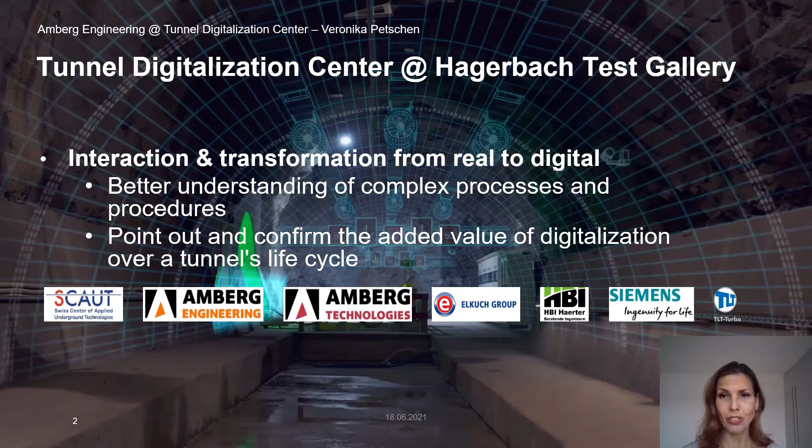Therefore, a partner ecosystem under the lead of the Swiss Center of Applied Underground Technologies was established, including industry partners Amberg Engineering, Amberg Technologies, Elkuch Group, HBI Haerter, Siemens, and TLT-Turbo. The focus is put on cross-phase and cross-divisional system solutions that cover the entire value chain, respectively, the entire life cycle of a tunnel, starting from the design using BIM, the operating and safety equipment, up to the operating phase and digital maintenance.

Metro lines, railway, or other infrastructure networks are part of today's smart cities, of the smart infrastructure. No matter if you are constructing something new, restoring or operating an existing network, we would like to show you how the latest digital solutions can help you to deal with typical challenges and make your teams work more efficiently. I'm going to mention some solutions that we offer in order to plan the new faster and model the existing, in order to integrate them into the same model or database.

Now, let's talk about the solution. We are regularly involved in underground projects by contributing with our know-how in every project phase, from the planning through execution till the operation, inspections, and maintenance. We aim for solutions that are useful for the whole life cycle. We create a digital twin that unifies all the discipline-specific models that can be fed with real-time information and can be connected to databanks, cloud solutions. And let's see how we get there.

In the case of new constructions, we get to a three-dimensional model by the process of digital planning. But we also have tools that can help us create a model from the existing structures. With parametric design, we create our model by smart copying the repetitive elements. It means reusing elements from our already existing library with specific or semi-automatic modifications.

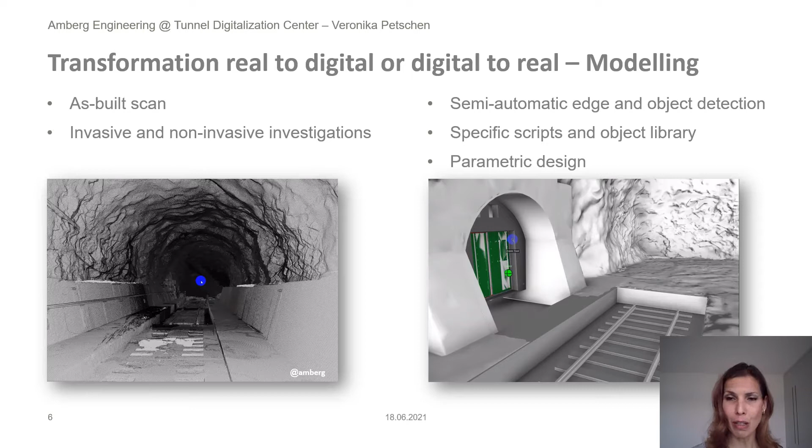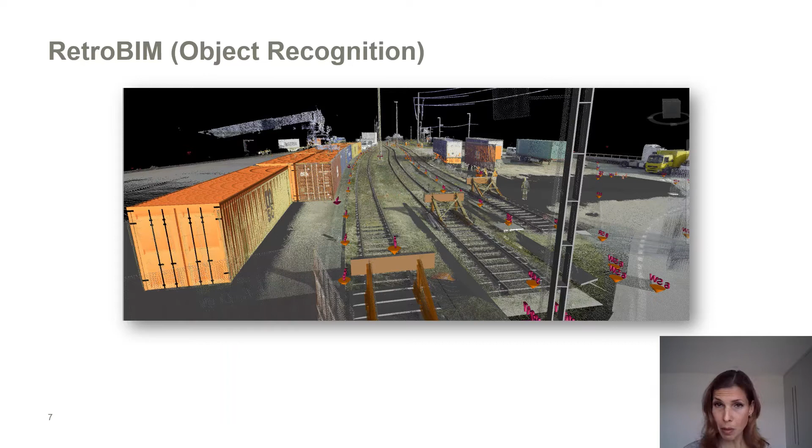For modeling the existing, we use laser scanning as a basis, and we recently developed an object recognition tool in order to drastically reduce manual work in modeling. How does it work? We take the point cloud from the as-built survey, analyze it, identify the elements for which we already have similar ones in the libraries, semi-automatically match and adapt them. And finally, place the right elements in the right place.

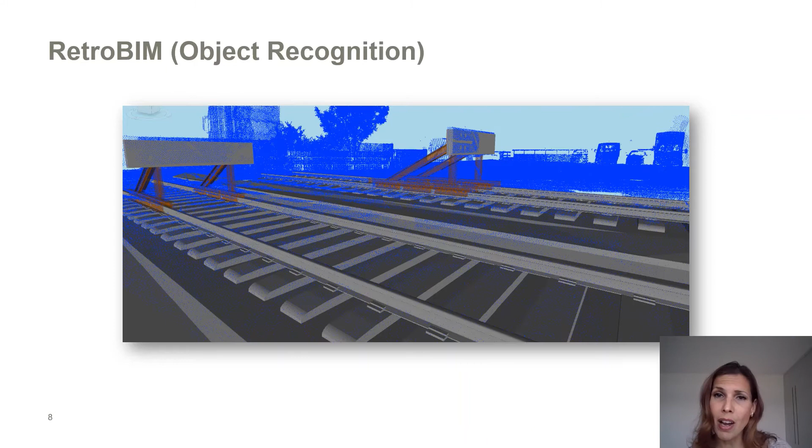Modeling geology and integration of the model in its context, meaning the digital twin model, via georeferenced elements is a must in tunneling. Underground structures are made with and in the ground, so it's essential to have a good model of it.

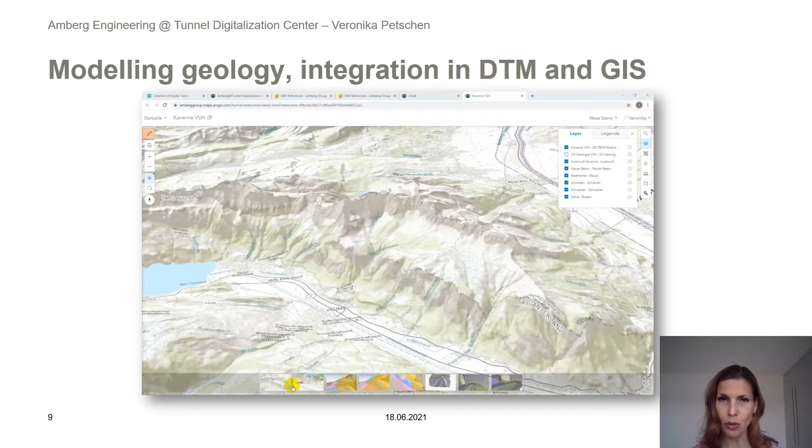If the three-dimensional model is ready, we need to feed the model with useful information. There are very user-friendly ways to visualize information. For example, just by clicking on one of the elements and getting what we want. A well-structured attribute system is a must for this purpose.

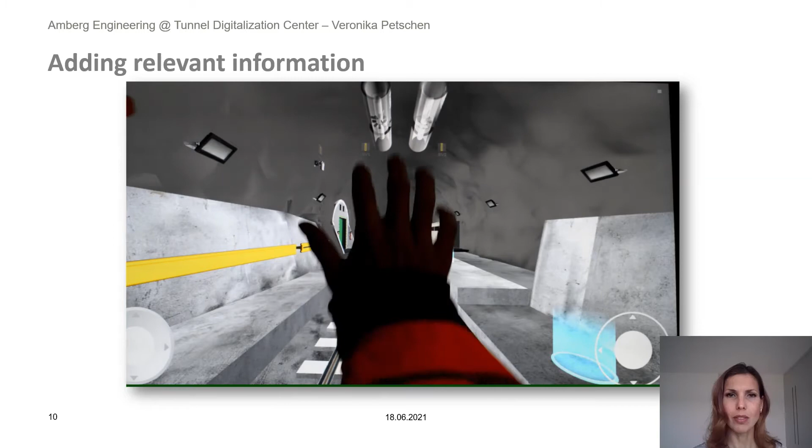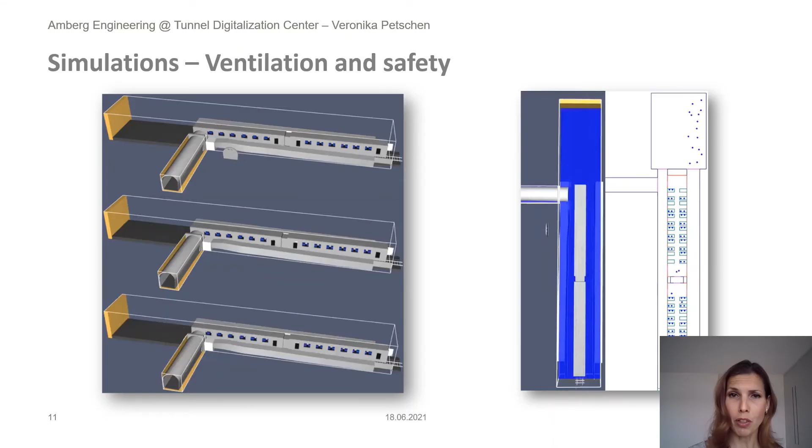For what else do we use all this? Let me just show you some possibilities. Simulations are very efficient to make before the construction or before the commissioning because you can prevent disturbances and accelerate calculations. The digital twin is the perfect frame for this purpose. You can also use the digital twin in order to simulate logistical problems by planning the construction program.

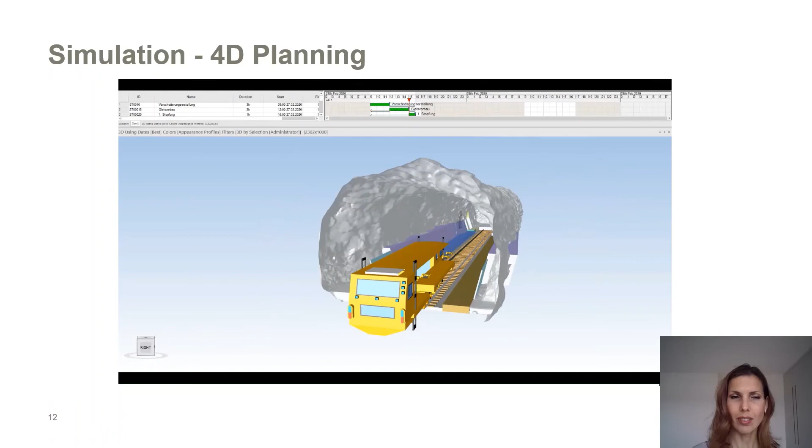For what else is a digital twin useful? Increasing dependency is not an option anymore. We use open data formats, obviously adapted to the client's needs. That's why we would like to use the Digitalization Center as a platform to have conversations about the needs and the possibilities. So in our digital twin, we collect data about geometry, metadata, and reconnect it with geographic data.

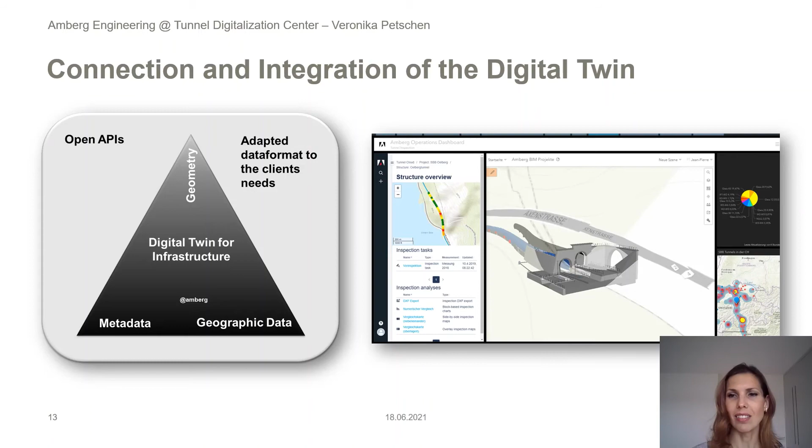A perfect solution is if different tools can work as independent solutions, but they also can be connected. It means the specific users only use the specific tool, but those who need more overview can easily have it. It's very practical to present real-time information, meaning IoT or sensor information, by using a GIS platform. So you can see your relevant data on one and only dashboard.

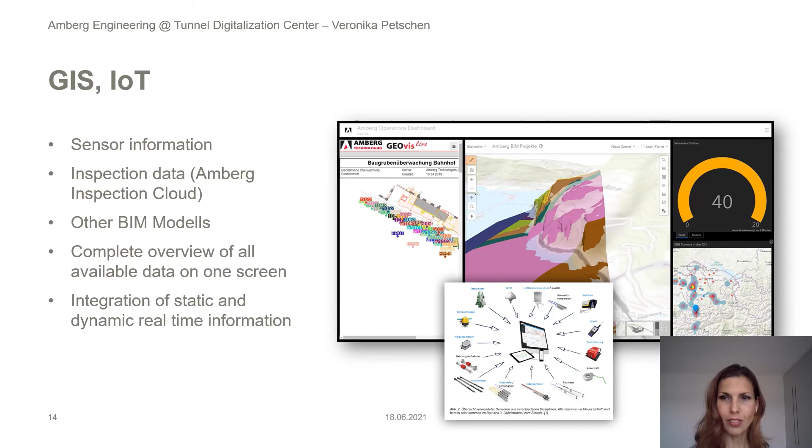If it comes to inspections, we have the opportunity to use our cloud-based system, Amberg Inspection Cloud. That's a tool also using artificial intelligence that helps us eliminate manual work by the recognition of damages. It can be used both offline and online. Many people can work on it together at the same time, and it uses open APIs for third-party cloud solutions. You can layer different inspections on each other, so you can compare the development of the damages and you can make the classification of the entire infrastructure.

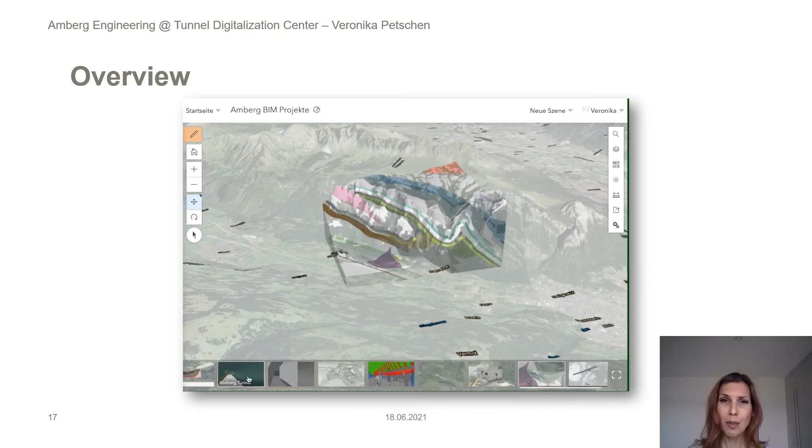What do we do with all the data? We also offer solutions for that. We build algorithms for finding the right information in your old PDFs or Office documents, make understandable structures of them, visualize them in a way that is useful for you, for example, by making smart georeferenced maps from them. Last but not least, I would like to show you how efficiently you can surf among your digital twins if we implement them in a GIS platform and have the overview.

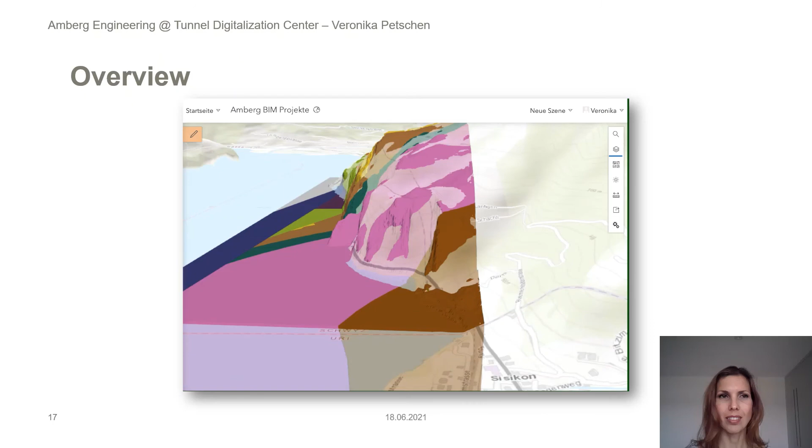What are the main benefits? We use one platform as interface for the three-dimensional modeling, BIM, geology, all technical models. Central coordination for all project participants is ensured. So we can avoid planning or intervention errors by virtual tours and simulations. So we also reduce project durations. The planning is going to be faster with the parametric models. The visualization of static, historical, and dynamic information is also preserved.

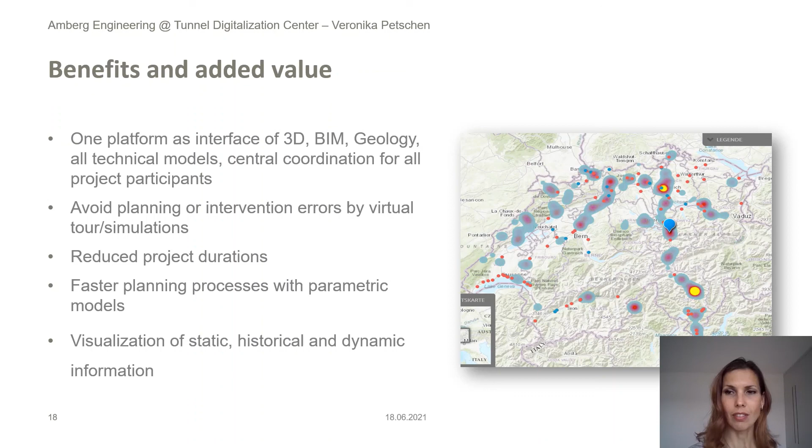Using these digital tools, we can achieve our main purpose, the transparency, the facilitated communications. We can take fast decisions, and most importantly, the trouble-free operation of the tunnel.